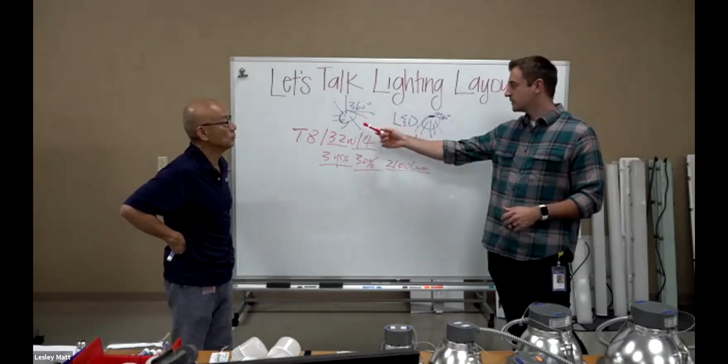So by nature of the LED, you already have an advantage in terms of delivering the foot candles on the floor, right? Correct. Do you take that into consideration? If you are retrofitting your space, you should. Because this guy, you're going to say, well, I had 3,000 or 2,100 lumens on this guy. Well, a lot of that light is actually wasted, it's going up into the fixture. And then 2,100 lumens on this will have a different foot candle count because it's actually directional, pointing in the direction you want it.

So now let's know something, let's do some real stuff right now. Are you able to, Leslie, everybody, are you able to do a real case study here to lay it out? Yeah, we'll do it.

We have a bunch of case study examples to show them. Okay, so now I need to shut up.

I challenge Jared enough in terms of old lights versus new ones. He cannot look at what your older lights or new lights are, or the lumen depletion. He doesn't care about any of those. All he cares about is foot candles. After you design the foot candles, you can relate that to the products you pick, then go back and compare to your original light source. Then you can calculate the return on investment.

Okay, so today is just going to be about the foot candles. We're going to step through a couple slides here. Let's go ahead and go to the next one.

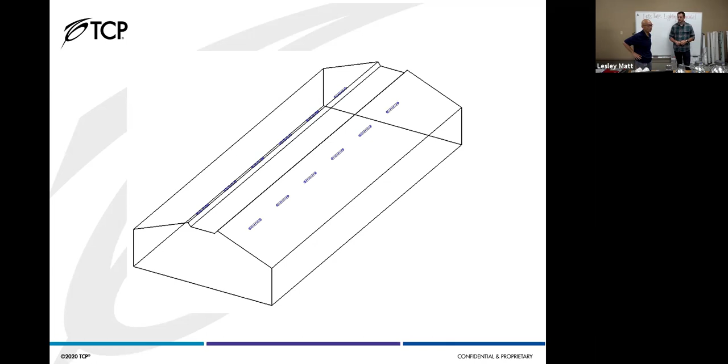Here's those lights. The request in this project was a 4-foot, 8,000 lumen special order GPS. We don't have it in hand yet since it's special order, so we can take our current IES files to represent that theoretical 8,000 lumen GPS, 4-footer, which is the 53 watt we were talking about.

So once I put that on there, then I apply a base on the floor. This time I did it to the floor because it's a church setting, and I don't know what the working plane is, so we'll just go to the floor. He said it was a multi-use space and requested a certain... so instead of 3 feet high for the working plane, you just go all the way down to the actual floor?

Okay, good. So this is what it looks like right before we give it to you.

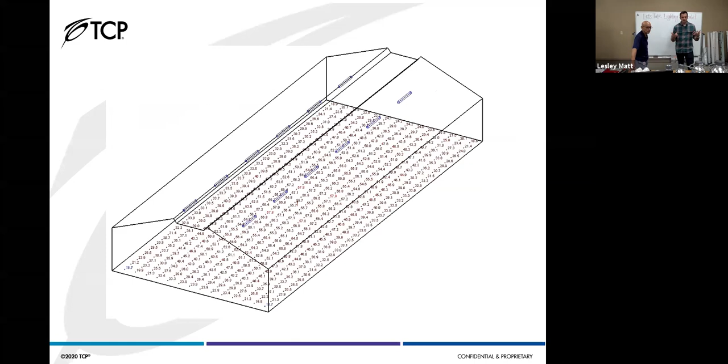The next slide shows a couple cool things we can do with our rendering software. We can render it in black and white, and we can also render it in color as a different range of foot candle. This tells you where the hot spots in your room are going to be, what it's going to look like on your wall washing, things like that.

So what this is telling me is that the red orange means the majority of the light's going to the floor, but the yellow green means more of where the dark spots and the shadows would be.

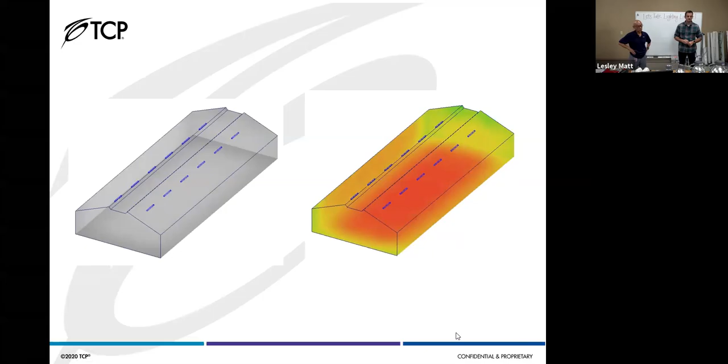Awesome. Didn't know we were this fancy. So let's go, are we ready for our next piece? Sure, yeah, we can keep going. Let me get the number 2 PDFs and go to the first one. They're all the same thing.

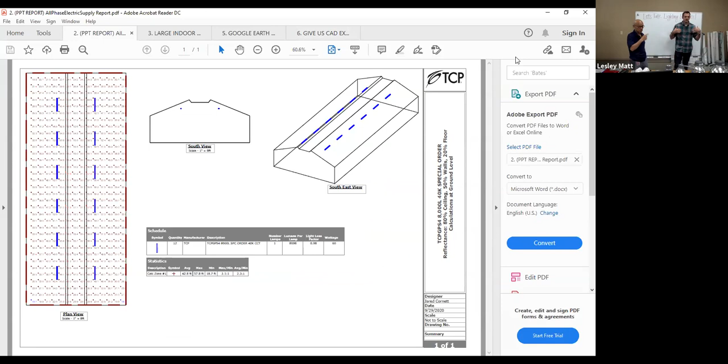So once I've done all of that for your guys' space, then that's behind the scenes. Then I want to give you a formal report so that you can submit it for bid, or you can actually show your customer if they're concerned about what the light's going to look like in the space.

This report has everything I just showed you, where the lights are, how they're on there. And then we also have a schedule on there, which on this one shows that we have a quantity of 12. It says what the product is. Because it's special order, I do not have an item number, but normally we would put an item number in there.

We also put in things like, what is our light loss factor, like what Ellis was talking about. Since this is LED, I put 0.98 because it's not going to be perfect, but it's pretty close. And then the wattage, I did not know that this was going to be a 53 watt fixture, so I put that in as 60 for you guys.

It's pretty close. And then down below that, this is where your statistics are, right below the schedule. The statistics are what really matters. When people come in and they say, I want a 40-foot candle average, that's where that spot's going to be.

And then we'll also have a max and min. Is that what I'm seeing right here? That average shows me 42-foot candles. So that's if they ask for a 40-foot candle average minimum, 42 is above average. That's where we're at.

And then we also have max and min values. Why are those important? Well, those are important because if your min is 0, that means you have dark spots, a very dark corner in your room. But if your min is, on this one, it's 18 — 20 is the requirement for offices, so 18 is still very close to that. You probably aren't going to have any dark spots in the space.

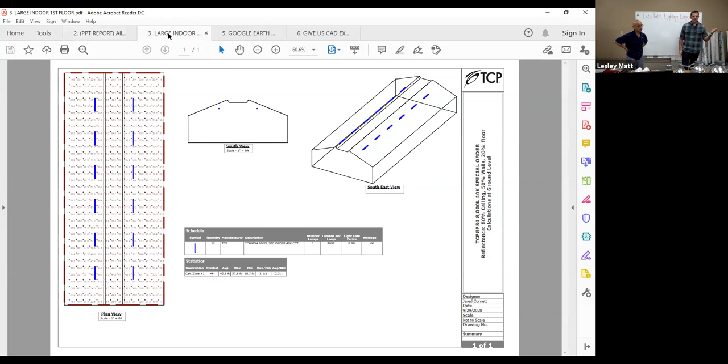So now we're going to go to one that's simple in theory. I'm going to go to one that was pretty extensive. Ellis, you'll do this one next time, right? Yes, I will do that. Yeah, Ellis will do this one.

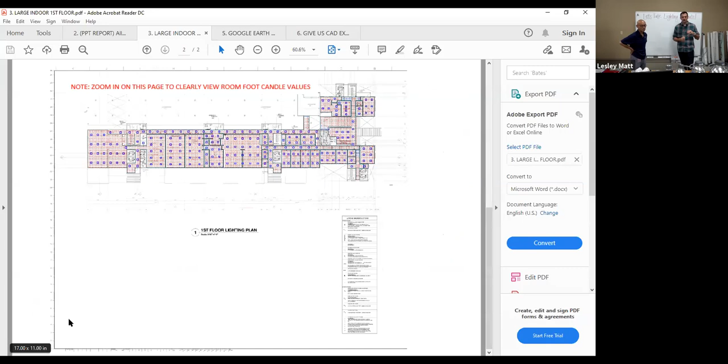So this is actually just the first floor of this building. There were two of these, and they're almost identical, so I did not include both of them. You'll see that statistics category is very long, so what we've done is broken out each individual room, and you can see what your average or max/min is going to be. There's a lot to consume in this slide, so I moved the statistics area over here because it's so large.

And then each one of these goes into a different space, a different room. So the top one - you did all those? I did, yes. Oh my goodness, okay. Are you impressed, Ellis? Yes, I am. Jared did this in between doing shows.

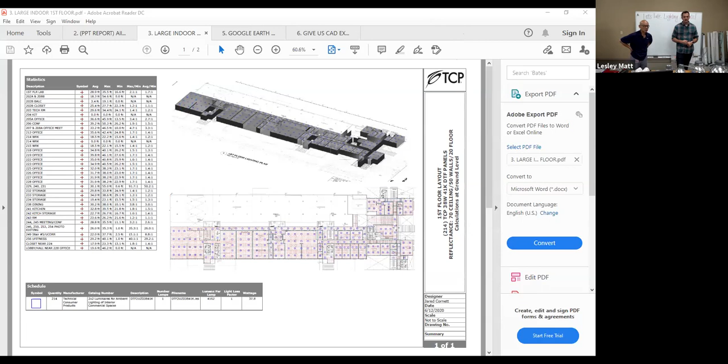My other job. Okay, so the top version is that rendering. If you needed a more blown up version, we could give it to you so you could see it a little easier. Right below that is the foot candles on each room. But if I go to this page, it shows it a little bit better.

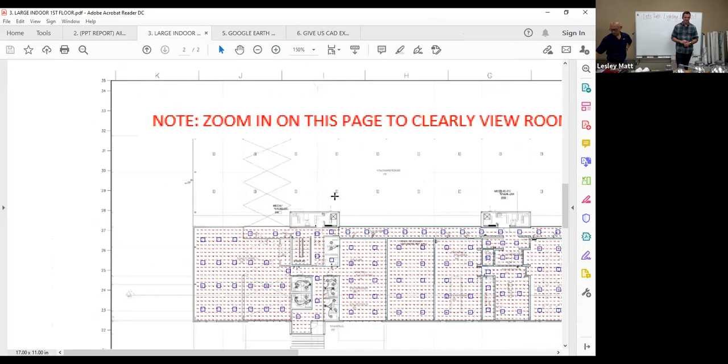So if you zoom in on a room, hold down control and just scroll in over the room. Don't close it - I am not a PC person, so this is a struggle for me. Here we go, keep going. So we provide this because on these really big spaces, it's difficult to see those foot candle counts. You can really barely see them.

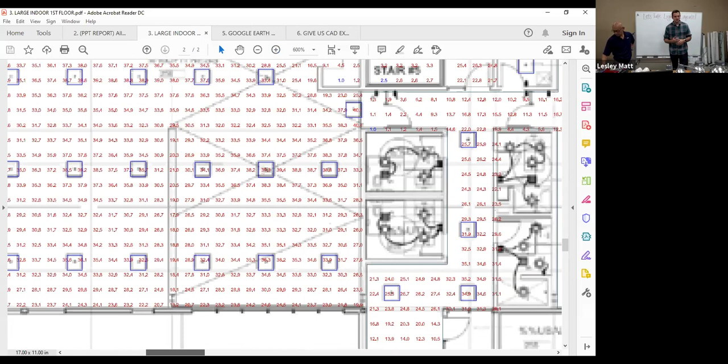So if you zoom in, it's nice and clear. This is a huge space, so you really need to zoom in on it. We actually put 214 panels on just the first floor. This layout turned out to be around 500 units - that's a huge building.

Okay, now indoor - how is your new tool able to calculate all the reflections on the wall, everything? So AGI 32 does most of that for me. I build the space, I put the lights in, and then it will generate everything for you. I don't have to physically go in and do every single ray tracing - that would be impossible. So that's all for indoor spaces.

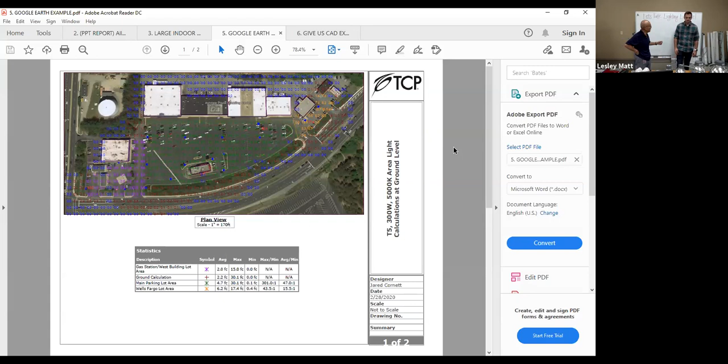Now that we know what the parking lot will look like, we also put the night lights into it, so you can see what it'll look like at night. That's all from Google Earth.

Based on that, we do the replacement, and this is the layout. This is a bunch of area lights for the parking lot, and this is the rendering for nighttime - what it's gonna look like in your space, where the dark spots are gonna go. Then just like before, we provide you that schedule, so you have all the lights you need, you know how many you need, and you know where they're gonna go.

Number 6 is what happens if you give us a little bit more detail - instead of just an address, you provide us a CAD file, a 2D CAD model, and I can put it in. Now you can actually see where your parking spots are, which ones are gonna have light and which ones aren't. It's not blank like the one before - this one you can actually see what's going on. If you're doing a parking lot layout, that's super important because then you can see the cars are illuminated at night.

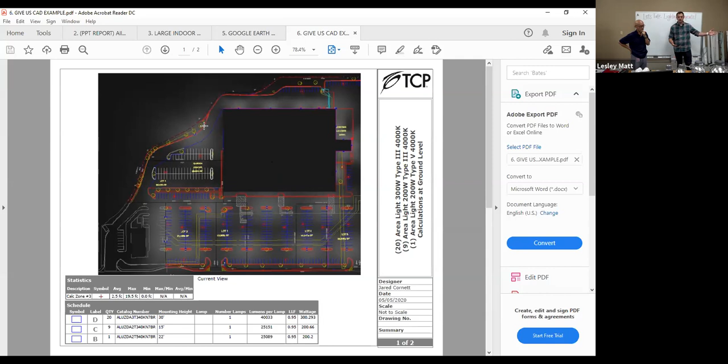That's for safety and security and people's peace of mind. So like a car dealer, you might be really worried about that car at the corner of the lot not having any light. If you give me a drawing like this, I can show you that corner of the lot is handled just fine.

And then there's your foot candles. If you zoomed in it's a little messy, so we provided a separate file for them to be able to zoom in and see those points - that's messy. Wow, this is really cool, guys.

What if it's simple, Jared? Like super simple, very basic - you're doing a square room like our little studio. Do I have to call you every single time? No, and I'd prefer if you didn't, because we do those really nice fancy ones for the really technical layouts.

Instead, we offer a tool on our website that lets you do a little bit of this yourself. Let's walk through that one - that'd be fun, because normally people do our office space, meeting room, one floor, right? That'll be easy.

So I'm on tcpi.com. Now what? Go to lighting layouts, there you go. Okay, so I click on that.

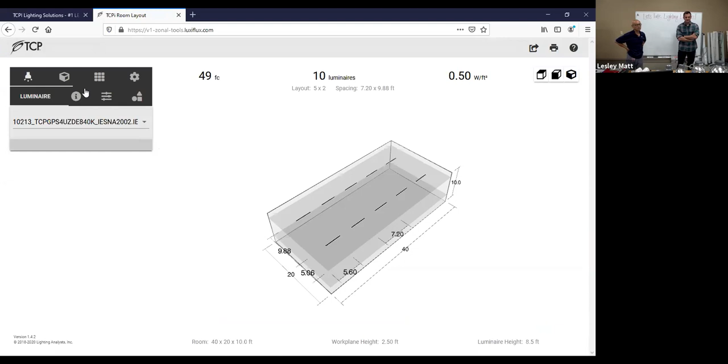Look at that - it already set it up for you. We have every single IES file on our website uploaded into this program - commercial downlights, makes it really easy. DTF series, look at that.

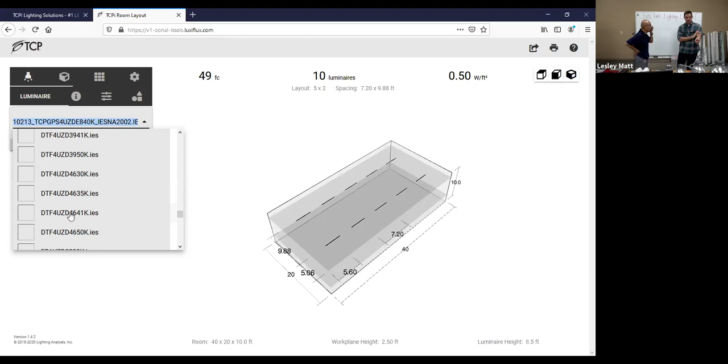So what do I do now? You just go ahead and click one, whichever product you're gonna need. Click the first product, go ahead and tap which one you want, and then you'll see that they just switched to those panels, right?

But what if my room's different? Right, go ahead and change your room size. So there's length, width, height. Like we said though, this is simple.

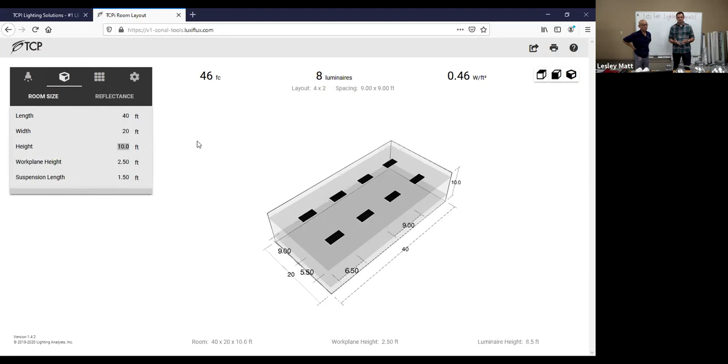If you have a vaulted ceiling - are you telling me I can't do a vault system with this program? Are you telling me this is associated with an office space? So you say office space, you type in the size of the room.

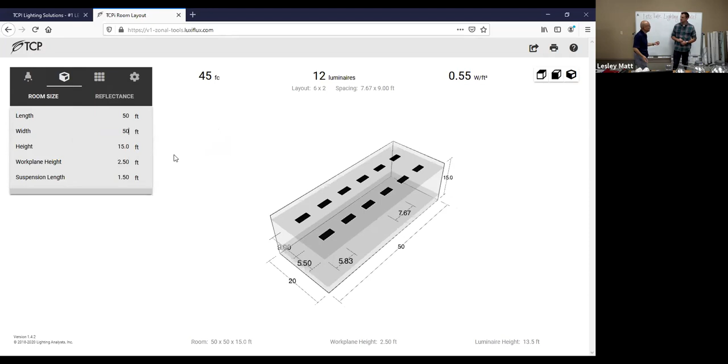You're literally using the standard, which is 20-foot candles at a 2.5 feet level - all those inputs are already in. Then you hit which products you're gonna use, and it instantly pops up how many units you need over there - that's what it just did.

So I changed the room size to a 50 by 50 room. You put in the foot candles. But if the roof ceiling is, let's say, lower, would it tell you there's too much light here? Sure.

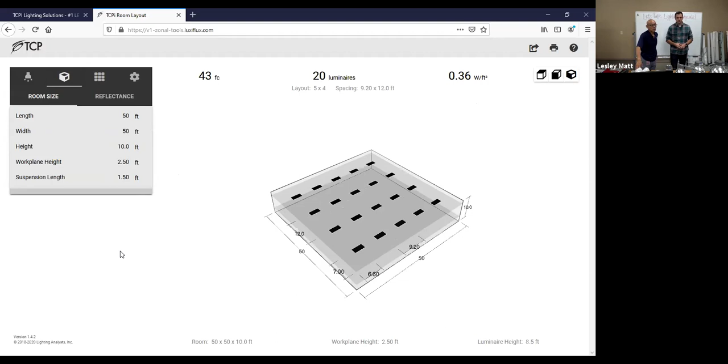It'll tell you that it's 10. So if you go to 10, you'll see there's 43 foot candles at 10. At that time, 15, you should know 43 foot candles is too much, right? It depends, right? On average, you want to be between 20 and 50-foot candles in an office space. 50-foot candles if you're doing detailed work like reading and typing. 20 if you're just hosting meetings. I know, I blew your mind right there.

Yeah, but now it's getting a little bit complicated. I tell you, no, at the end of the day, it's about savings, right? I mean, you cannot give me too much between 20-foot candles and 50-foot candles because that could end up being 20-foot candles, 29 watt of the 2x4 might be just good enough versus going up to 46, 29, 46. You're talking about 17 watts difference here. So what advice do we give to people? You cannot say, oh, I don't know what you do, do you do the detail work or not detail work?

But in order for the electrical distributor contractor to win the bid, they win the bid on the savings a lot of times. So these bids, does the tool you have over there give people both? A lot of times when they go out to bid, they have that minimum requirement in there, so they already know. 35, 25, 20, 30, 10 - they need that. They can simply go through that. So if we end up with 50, they have to pick less wattage. Correct, but the program will not do that for you. You have to go back to the beginning to pick a lesser wattage. Correct, and that's where you kind of have to use both programs, like you alluded to, Ellis.

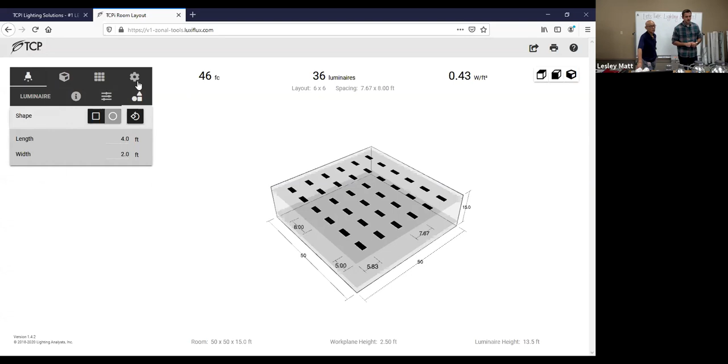Go over one to the left. So here's that desired illuminance that Ellis is trying to get at. So if you specify - bring that lower so we can actually type that in, I believe. So if I want to put it at 20, there you go - now you're seeing those luminaires change. So now what you were saying, hey, set it to 40 and then I'll pick my luminaire, and it put more lights in because we needed more to hold that 20. No, that's not what I'm talking about, okay? That's the situation that you're looking at.

Let's say you need between 20 and 50 foot candles. The job you just did delivered 46 foot candles because you picked a 46 watt unit. So I said, what if I only pick the 29 watt? Do I still get above 20 foot candles?

If it does, then at 46 foot candles with a 46 watt unit, it showed 25 units. If you switched to 29 watts, which we did, it bumped us up to 36 units because we had that 46 foot candle requirement. So now we changed that foot candle requirement.

We changed it to 20, and at 29 watt, I have 16 luminaires. I see what you mean. It goes down to 12. So actually you're doing a little bit different from what I'm thinking about.

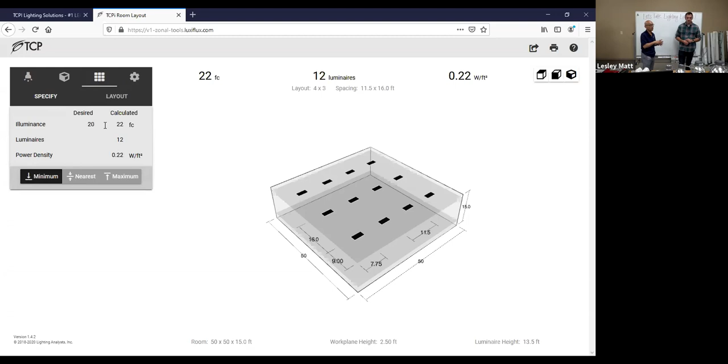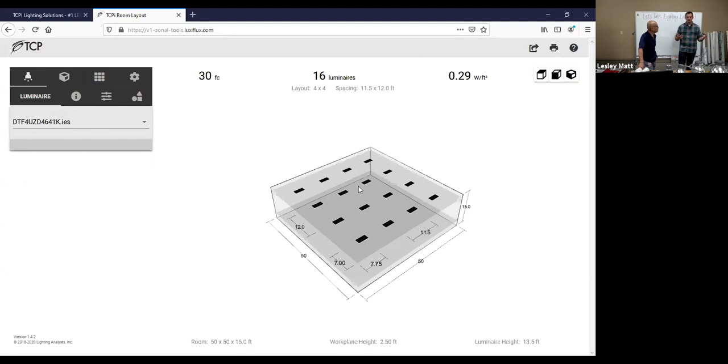It calculated 30 and 16 luminaires, and at 46, 41. So it's going to try and evenly put the units in your space, and that's why you can't get exactly 25 because the 50 by 50 room just does not fit for that.

However, you forgot something else here. Ceiling is fixed, you have no choice. He's trying to show that you can use the 29 watt instead of the 46 and get the same light. Jerry, another thing we have to be careful of: you cannot pick whatever you want because ceiling is fixed.

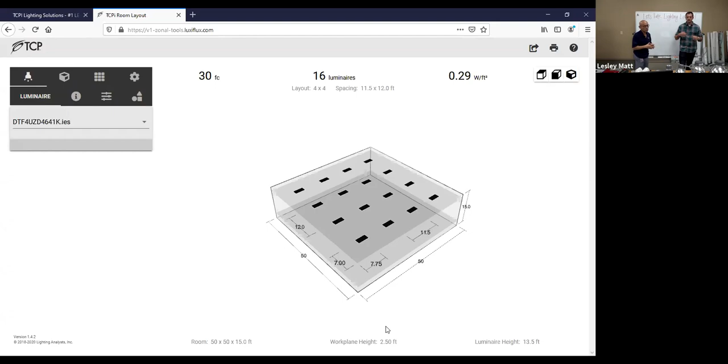I have panels already in the ceiling. You cannot change that. And that's why this program works really well for new builds. If you have existing fixtures and locations already in the ceiling, sometimes you still have to call me because it's fixed. Sometimes you'll still have to call me. Don't feel bad, that's the reason you have a job. If nobody's calling you, you don't have a job. So call him.

This is complicated because it's easy to design a new building, however you have limitations with existing buildings. Let's say we have a 32 here. Paul cannot say, hey, you tell Paul to do a 40. Paul said, I only have 32 holes here.

I'll give a good example. When we retrofitted your farm, I did the lighting layout. I looked up the IES foot candle requirements for that type of application, and it told me that I only needed 12 fixtures. We put 30 fixtures in that building. Why? Because we wanted to make sure it was overlit and it was a 1-for-1 replacement because you didn't want to pay the electrician to rewire it.

Exactly, because it would have changed the whole rewiring. So you have to do the final judgment. There's so many factors - the ROI, the 1-for-1 - so many factors that go into it.

Go back to your farm case right now. Eventually you put 30 fixtures because you wanted to do a one-for-one replacement. Since you do that, you could have just dropped your wattage. Because we have wattage selectable drivers, you could just drop it down a couple of notches and get the level that you want.

Exactly. So in this program, I have more control over those types of things, you can see here.